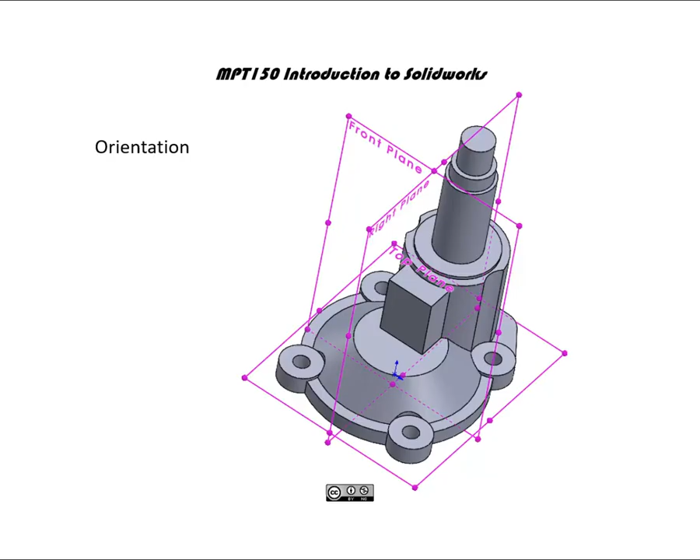Practice problem: 8.5 millimeters, grams and seconds. Part origin is located at the center and the bottom.

We have lines, circles, center lines, lofts, extrude boss, extrude cut, and circular pattern. The loft is between two circles.

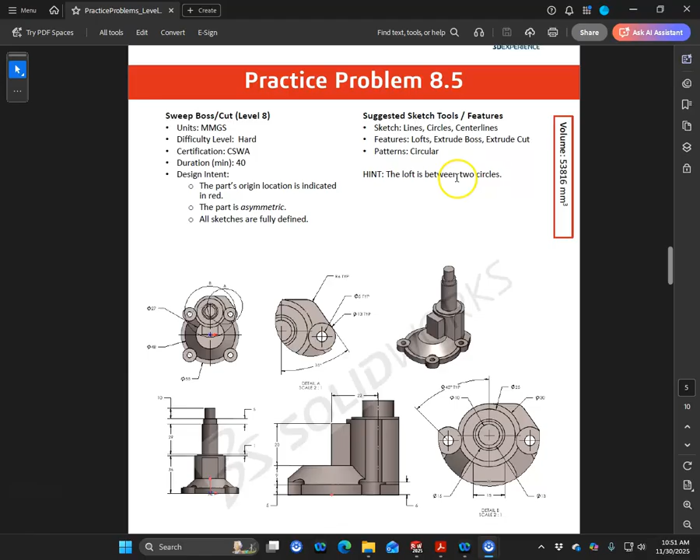All right, so let's go ahead and zoom up a little bit on this and see if we can get a little better detail.

I'm not sure why this needs to be a loft. It kind of goes towards could just be a revolve, but I think part of this too is just going to be looking through, being able to see through the noise.

All right, so we've got a couple different scales going on too. Detail B is the bigger, and detail A is the smaller. So we've got to come up with some way.

So that's the undercut and the boss. Those are a little bit taller.

So that face to that face, and then the undercut or the relief back to that geometry and up both sides.

All right, let's go to 10 millimeters, 30 millimeters, 25, 45, 15 for the square. And then what do we need for the outside? 55 and 48 going to 27.

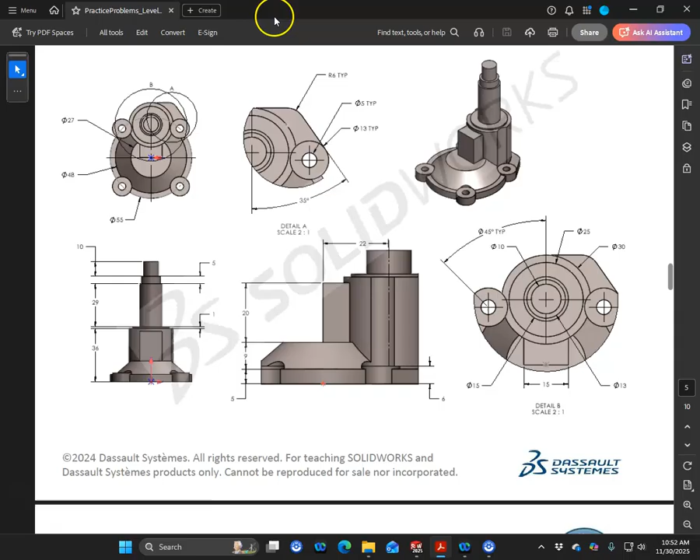And the height then goes 5 millimeters to the step and 9 millimeters to the top of the base. All right, well, let's get started with that.

And we'll see where that goes. We're going to start in the top plane, and we'll go with

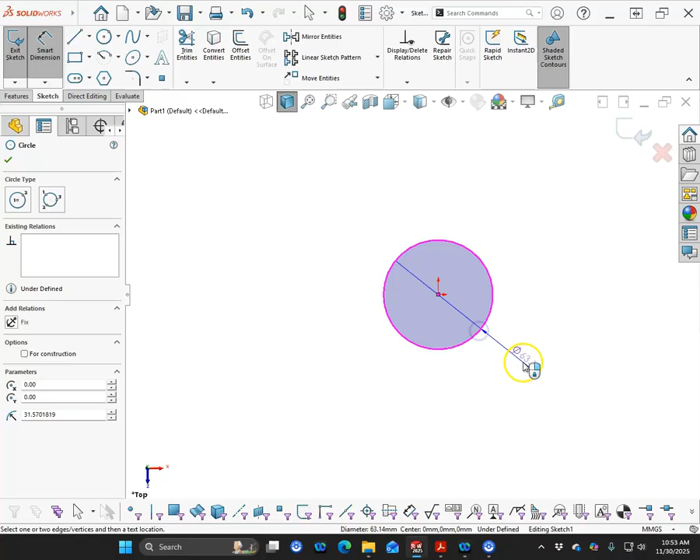the 55 millimeters to the outside and extrude it up 5 millimeters. Okay, so that gives us a starting point.

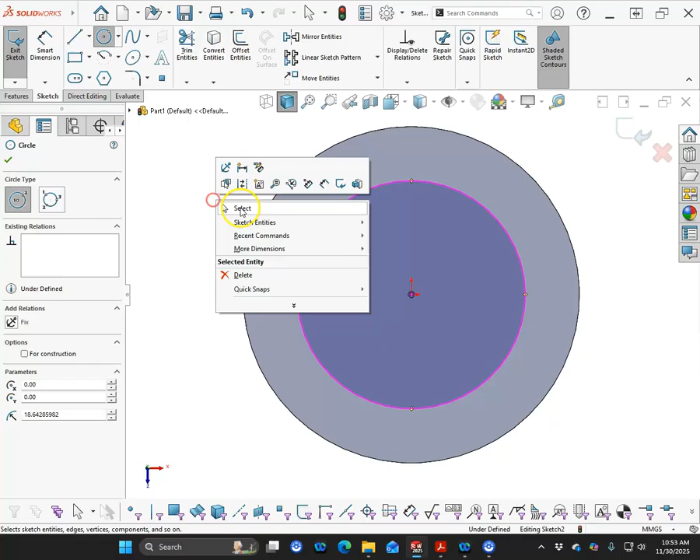The circle then at the bottom, and again, I probably would have, if they didn't show a loft or recommend a loft, and we weren't actually detailing a loft or introducing it, then I probably would have just done this as a revolve.

All right, so the right plane—nope, we need to still be in the top plane. Hold down the control button and select the plane, drag up.

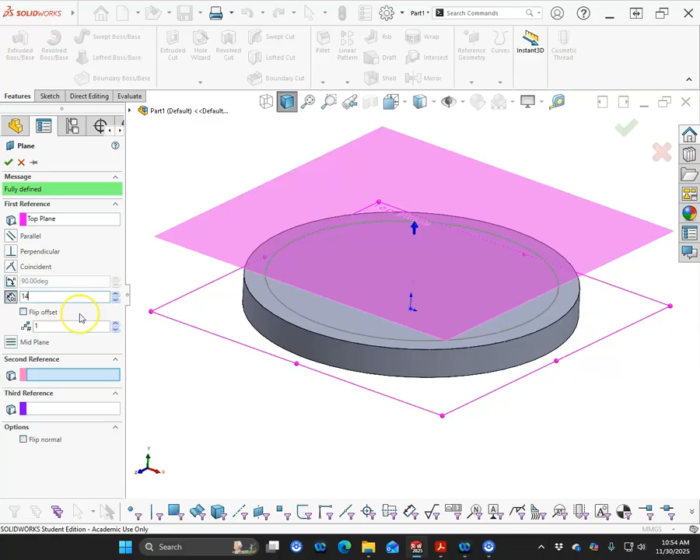We have an offset distance of 5 and 9, so let's just go with 14, make that easy. And then we'll go with a sketch on that plane that goes to 27.

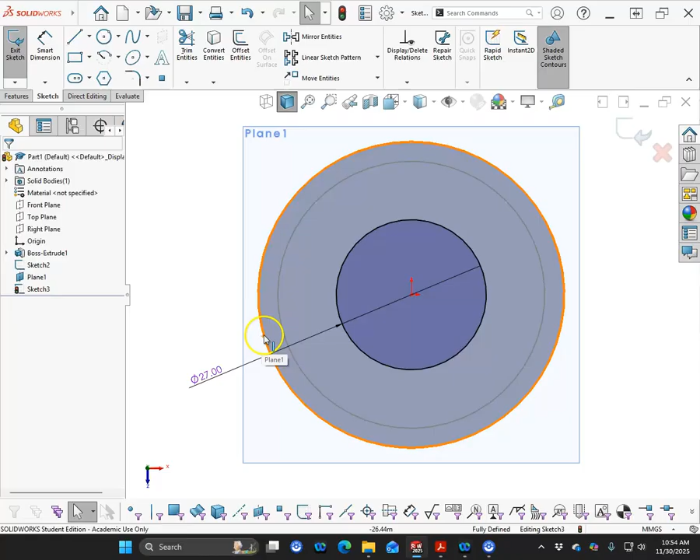All right, so kind of like the sweep, we need to have two sketches, or in the case of a loft, two or more. And what that's going to do is calculate the geometry between.

So if this is just a straight line and it looks like a revolve, then we're okay. Where the loft would really become handy is if maybe this had a bulge or shape, or these were elliptical and we couldn't do them with those shapes.

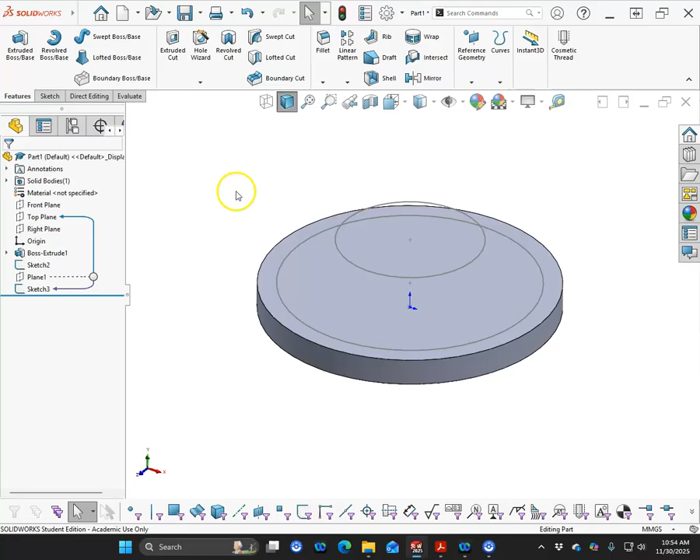So let's go to the lofted base, and we're going to do sketch 2 to sketch 3. I don't really want to move these because I think they're probably in pretty good shape along the right plane. And if we move this, it's going to start to twist and do some strange things.

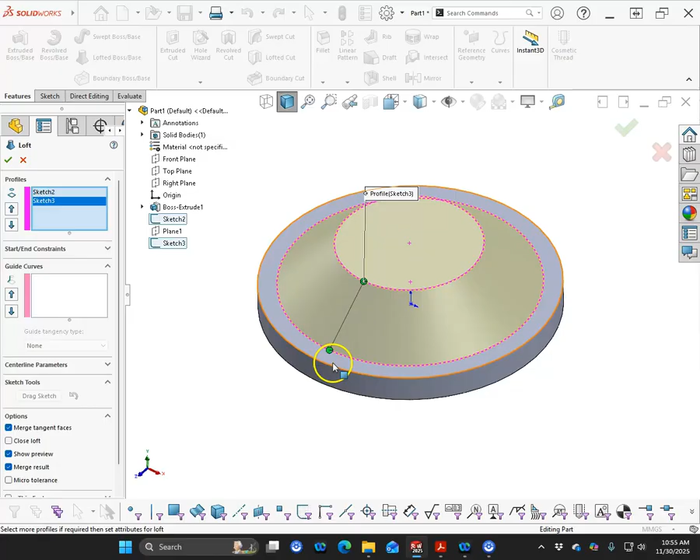Could always do a guide curve from point to point. That's one way. There are other methods that we could possibly work with to manage the circles.

All right, so what do we have for a bolt circle? 45 degrees. We have to the outside.

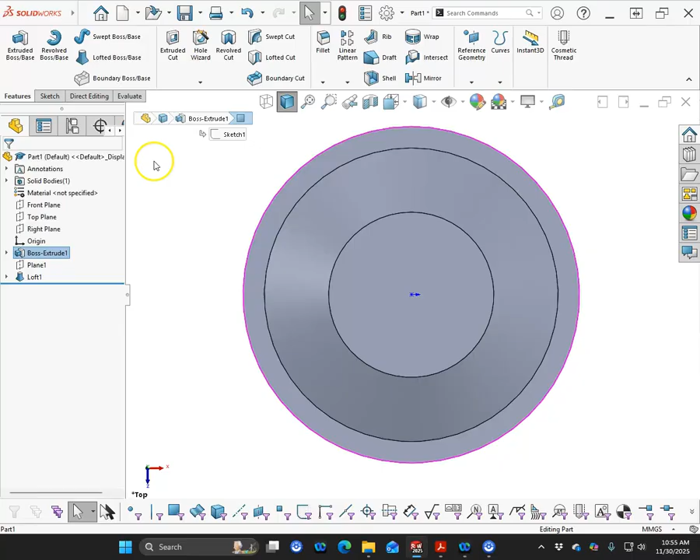So let's go back. Well, we can either pick the bottom or go to the top plane. Doesn't really matter. So let's open up that sketch, and we'll go ahead and put in the geometry.

Since I don't really have anything to build from, let's see, that diameter was called out as a 13.

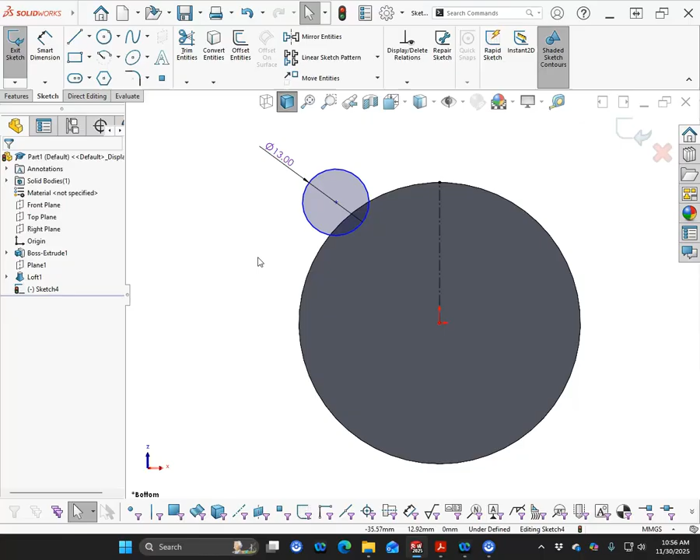Okay, and I'm not too worried about the geometry for the hole and the cut yet.

So we previously tried to do the vertex, an endpoint, and a point, and now it gives it to me. I'm not sure what was going on with that geometry, but if I needed to, I could have put a point up here and just picked between 3 points.

Or if I wanted to go with a line, I would need to put another center line, and that would give me an angle between the two center lines. So there's an angle off of the back side.

I wonder if they're going to try to blend that. No, it's just off of—actually it's off of the other side.

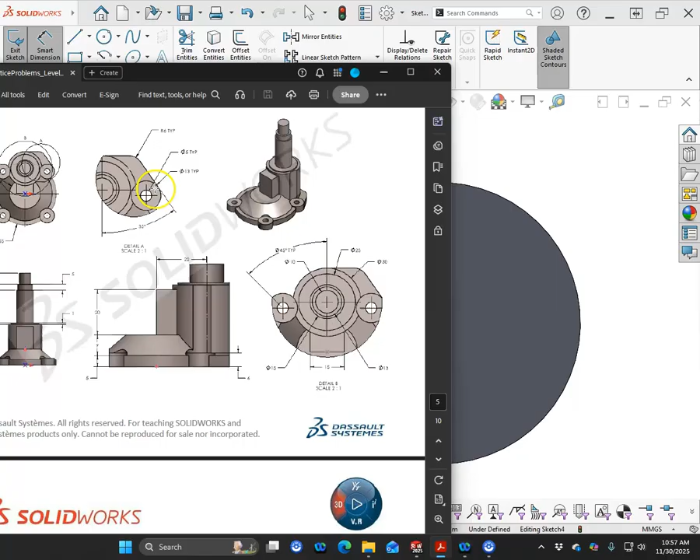So let's take a look. This has a lot of noise in it. So 13 off the back. I'm not really seeing anything that indicates a center.

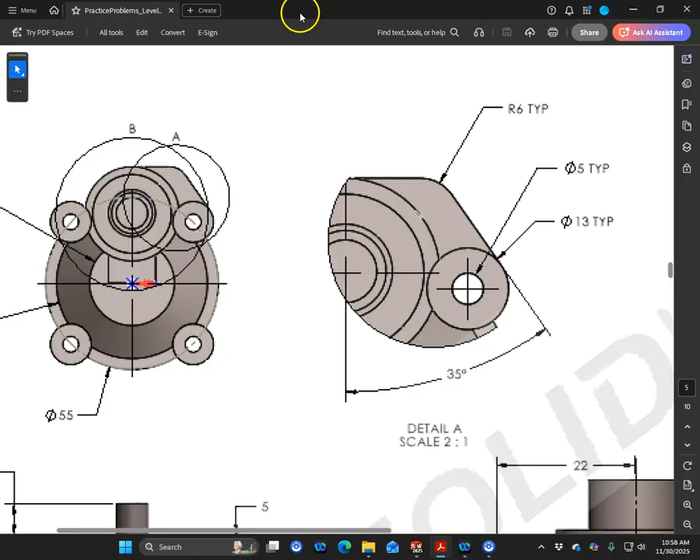Well, it's sort of. Yeah, and it's another one of those. Let's kind of go over this way. So yeah, it's looking like the 55. Okay, well, we're going to go with the bolt circle is the outside or the perimeter of our circle.

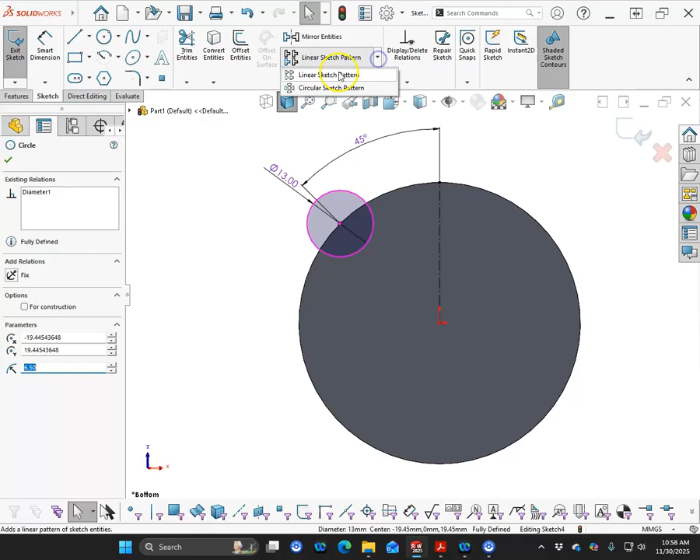So get out of the dimension by hitting escape. Okay, make sure that I'm actually out of the escape. All right, let's go ahead and just drag it then. And we will go ahead with a circular sketch pattern. We have the 4.

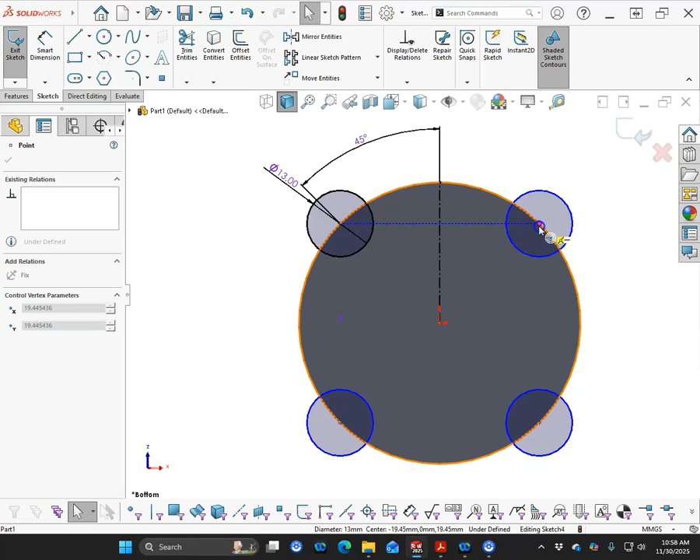Didn't really let me put that in, but let's then dimension the radius. See if actually that one should already be there too. So let's just get the 45 in there. And then we can drag away, drag back, pick one of the other ones, drag away and drag back, and that'll give us our fully defined. All right, so I drew that on the bottom. It went normal too.

So that geometry then got called out on the step to a height of 6. All right, let's make sure. Yeah. So 6, and pretty sure those are going to be the steps. So I'm not sure why they would do that. Makes the machining at this intersection more difficult, but

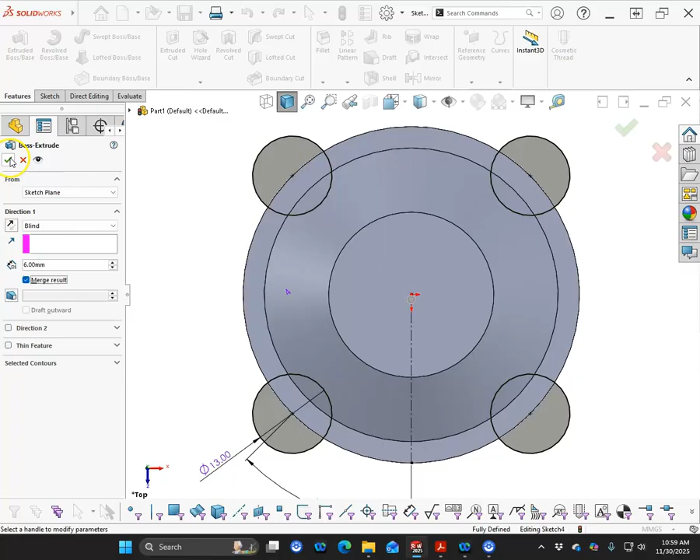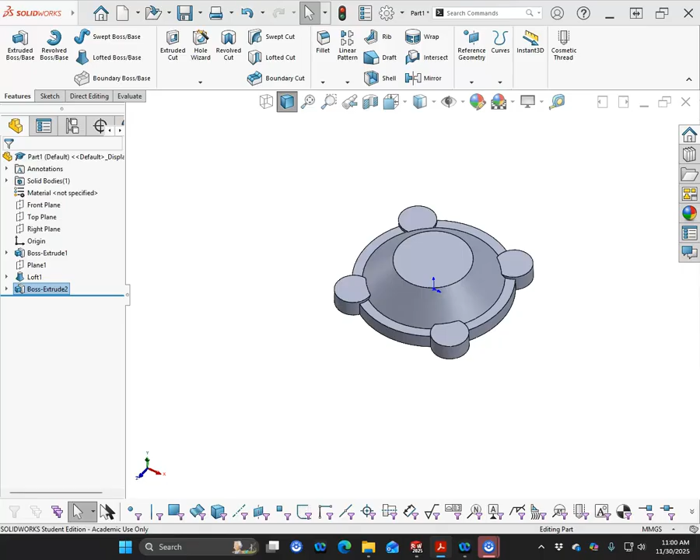if we're actually manufacturing, or if this was a casting or 3D printing, we wouldn't care so much. And it would help to go the right way. So let's edit the feature again, flip the direction, and go ahead. All right, so this corner to this corner, those will ultimately need radiuses or something else if we were actually going to manufacture this piece. All right, so our diameter then, we have the steps.

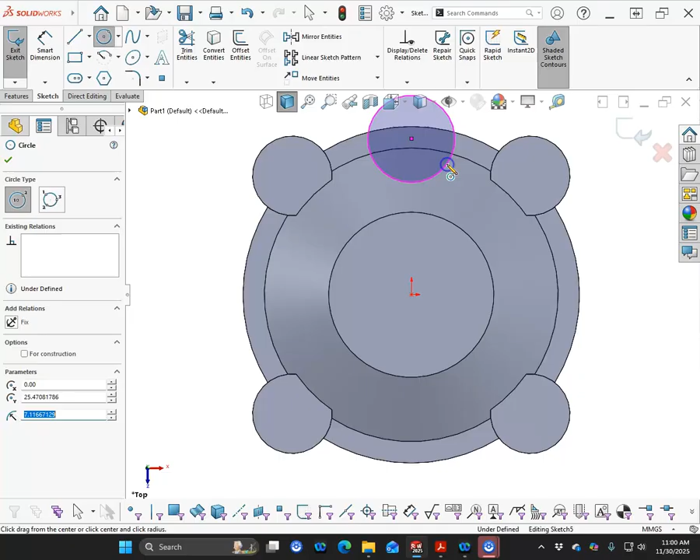So let's go to the top plane and you'll see the difference that the top plane comes back this way. This segment is going to cut in on each side into the end of the base. So let's see, they're giving us center line of 22. So let's start it somewhere. We'll get close to vertical. And the exterior is a diameter of 30.

And let's just go 22. Okay, and then the last will be to make the center point and the origin vertical. Do I want to go ahead with the rest of the items? My tendency, if I was just drawing this, I would probably put the other circles in so that I could reuse that sketch, but I think I'm probably going to end up with just too many selections there.

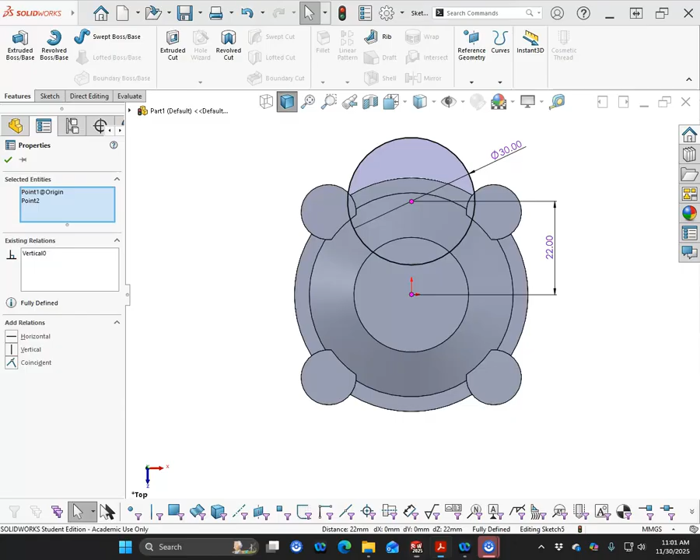So for this one, we're going to go ahead and extrude and bring it up 36. Open up the next sketch and find our center. So if I don't find the center, I'm dragging over the perimeter. And we need a dimension of, we went 30, and then we're going to have 25, and that is going to go up 1 millimeter.

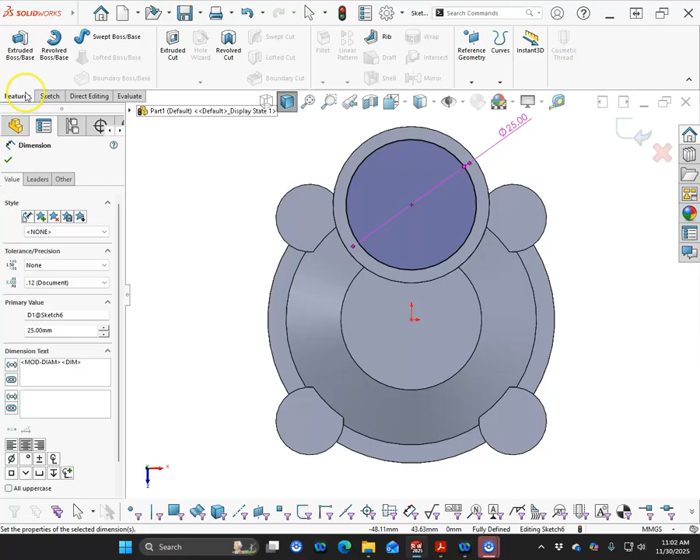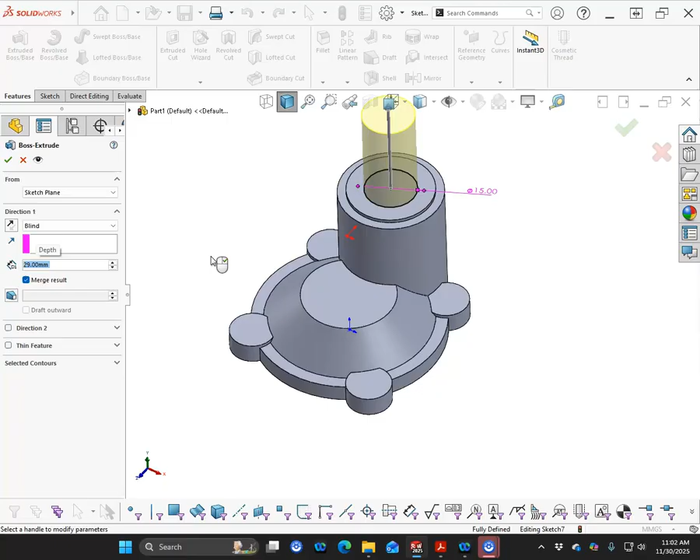Yeah, I think this is going to work out better too because these are all chained together, one on top of the other in the dimensions. If it was baseline, we'd be better using the shared sketch. So this one goes to 15, and then we're extruding it out to 29. Okay, just kind of double checking the numbers as I go.

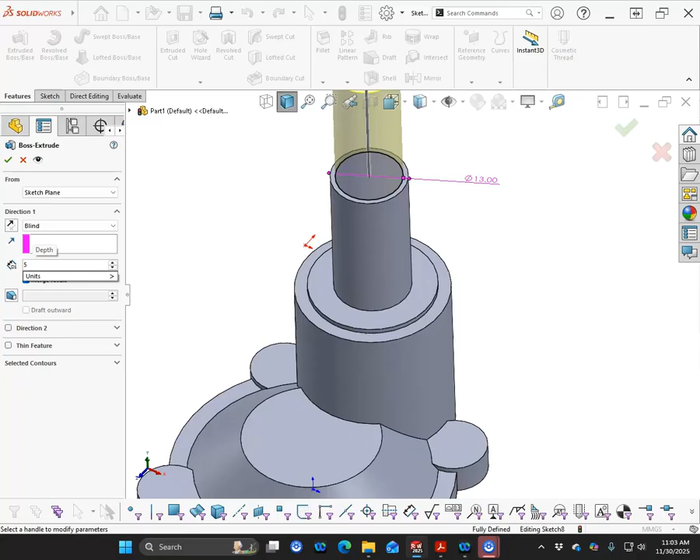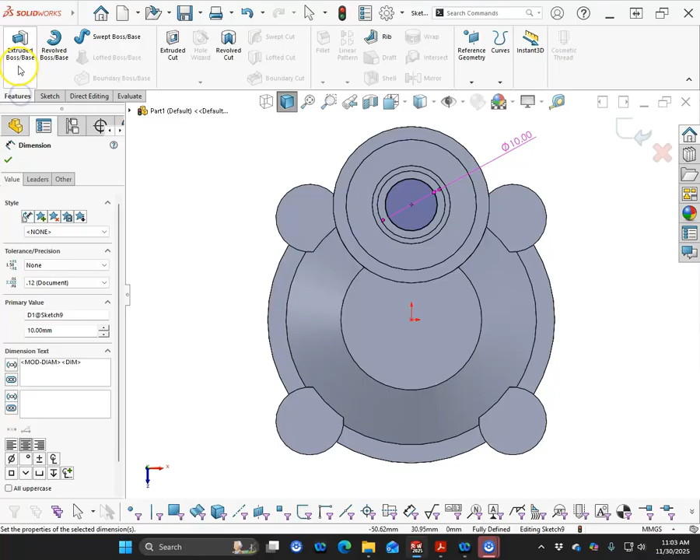Open up the next sketch, goes to 13. And extrude. And then that one goes 5, and we'll accept. And then the last sketch goes to a diameter of 10. And features extrude, and then also 10 millimeters. All right, couple enters to clear that out.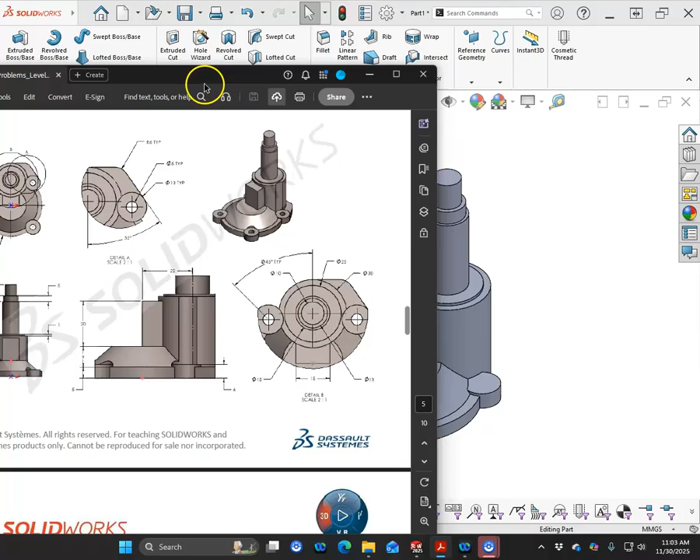All right, so I think we're looking pretty good. Let's do a reality check. So this backside has a little relief or an add-on. 35 degrees, tangent, tangent. So we should be able to do that. Probably end up just converting that geometry. So we're getting close, need the block in the center. Don't want to forget that.

So let's go top plane and sketch. So when it comes back around, I'm not trying to reverse or manage that geometry. So let's go with our shape. We had an angle of 35 from the vertical. So rather than doing math and figuring out what the adjacent angles are, I can put in a center line and set the angle.

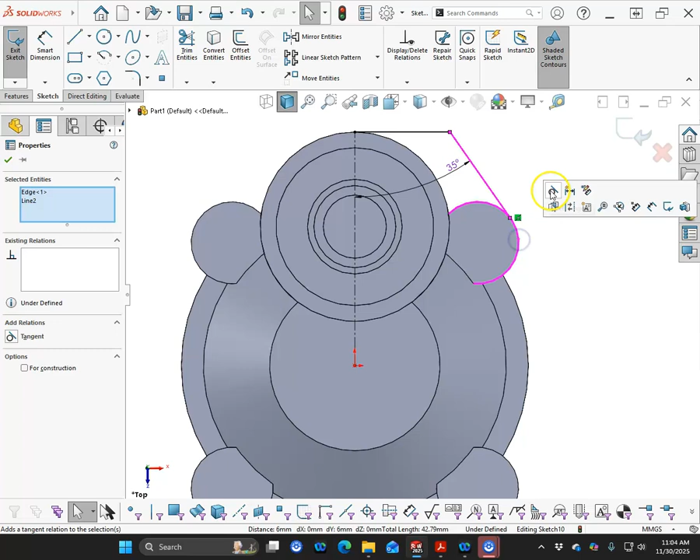Let's see, did I get a tangent? I got the coincident, but I did not get a tangent. And then the fillet is going to be radius of 6.

So let's go ahead and put that in there. And then we need to accept. Let's pick and convert. And then with the convert, it'll probably be a little easier if I drag those endpoints back around and just make it a complete region.

So extrude, and I'm going to do up to surface since it should have the same height as this step, or in my design intent, I would like it to have the same height. All right, so on the rectangle then, let's go ahead and select the midpoint, the origin, make it vertical. We have a width of 15.

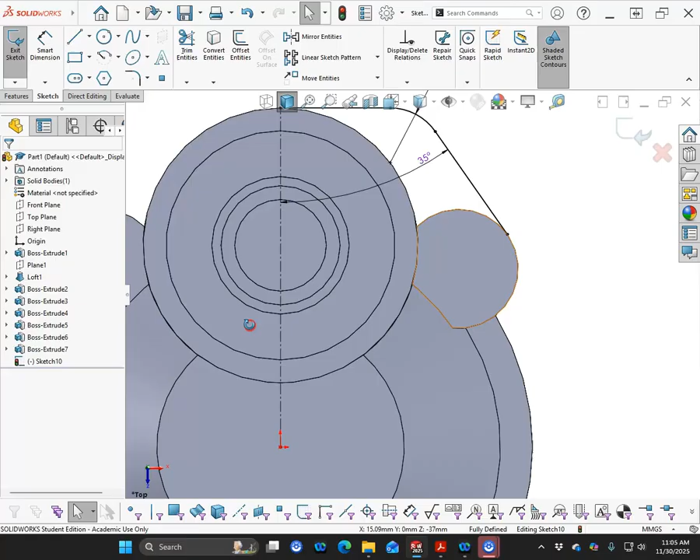And where is it positioned at? Actually, looks like, yeah, it's going through the center. All right, so didn't need to make them vertical. So we'll just go ahead and switch it to midpoint. As long as there's not a conflict there, the vertical won't really do anything.

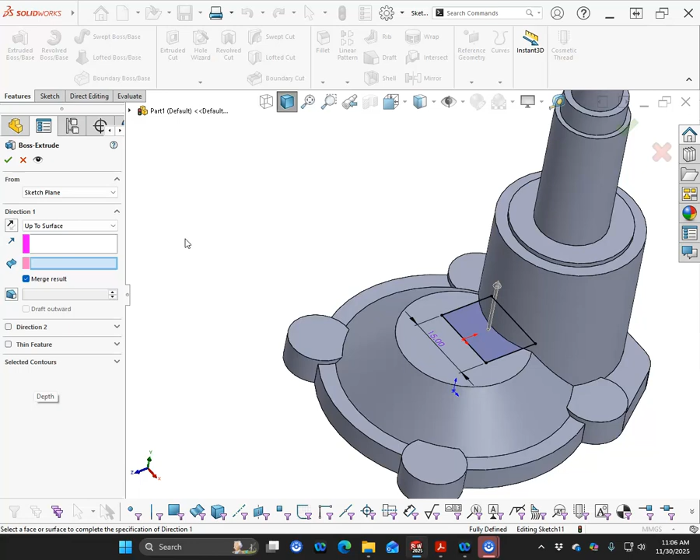And then I happened to grab coincident apparently. Yep, grabbed coincident on one side, which since it ends up subflush to the surface, I don't know that that's necessarily a bad thing. And we're going to extrude this to 20. Oh, I guess it would help to put it back in blind, 20 millimeters. And okay, any radiuses, fillets, blends on that? Okay, now we can concentrate on these guys.

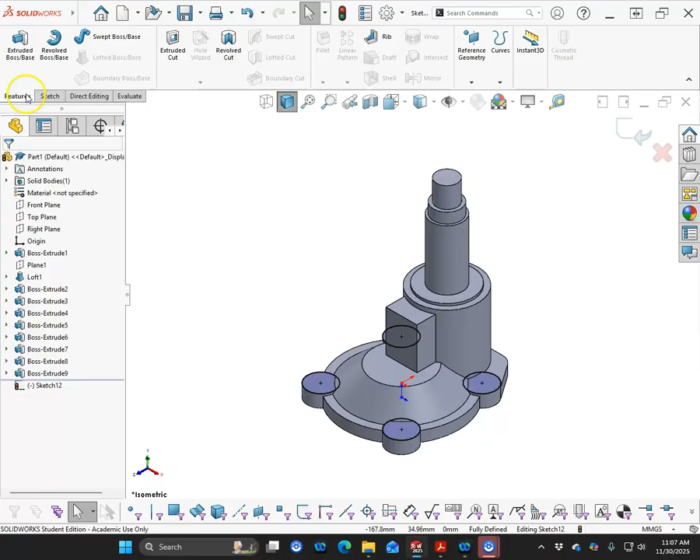So let's do the convert again, and we'll use that drag. Okay, so once we convert the entities, probably be a toss-up to just drawing the circles again. But since they're tied to that geometry, it does kind of help to build that out. So let's go ahead and extrude cut, reverse the direction, up to next, go ahead and accept. All right, so that's looking pretty good.

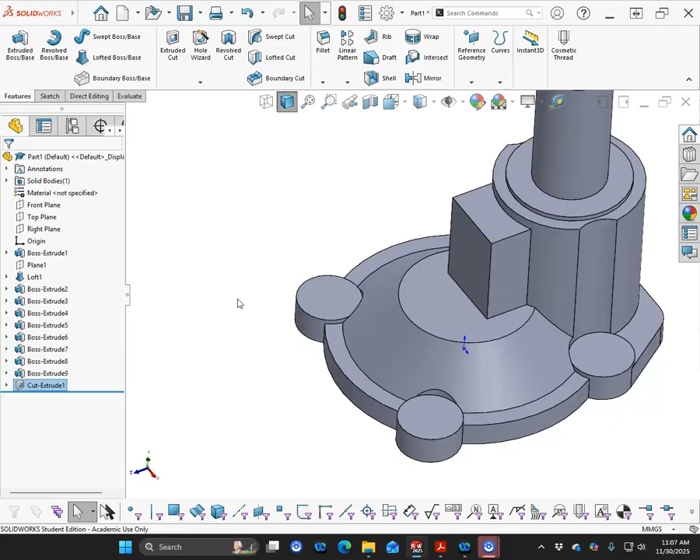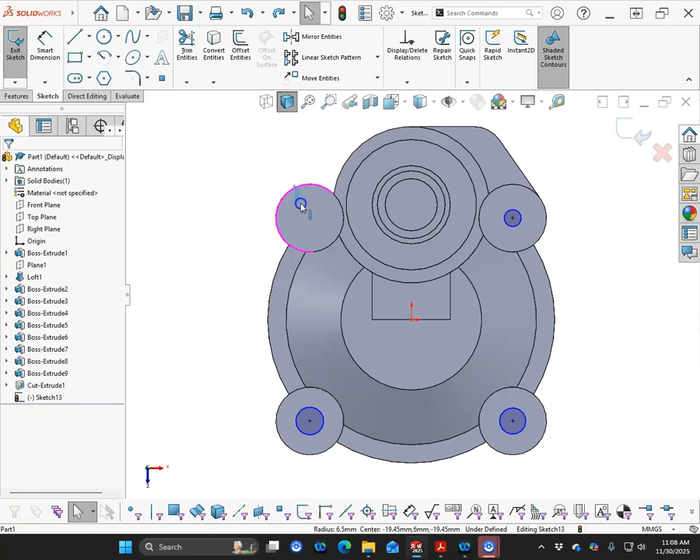And then our last bit of geometry that I can tell is going to be the diameter of 6, and those are centered. So we drag over the edge, find the center point. Yep, let's make sure to place it. Well, didn't want that one, so I'm going to give it a Control Z. Yep, kicked me out. All right, and we'll go back in.

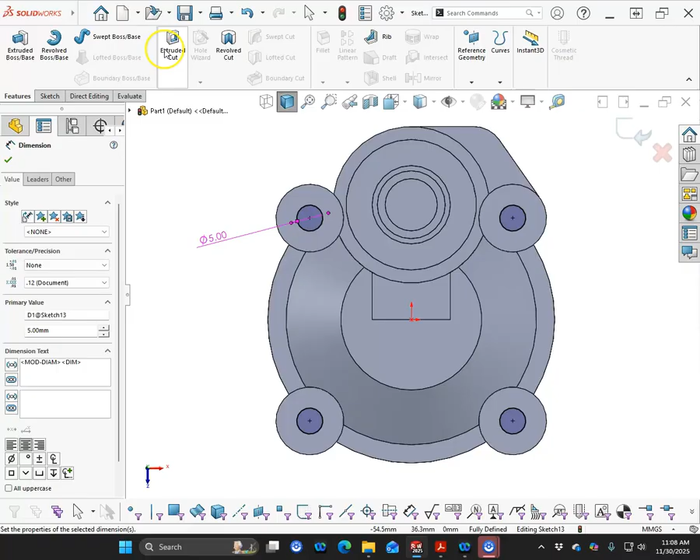All right, all of these are going to be equal then. And we'll go into the dimensions, set it to 5, and extrude cut. And we'll go back to through all. All right, so a quick look at the geometry in our isometric. And that looks pretty darn close. We've got the little elliptical reliefs, the little fingernail cutouts, and the shapes.

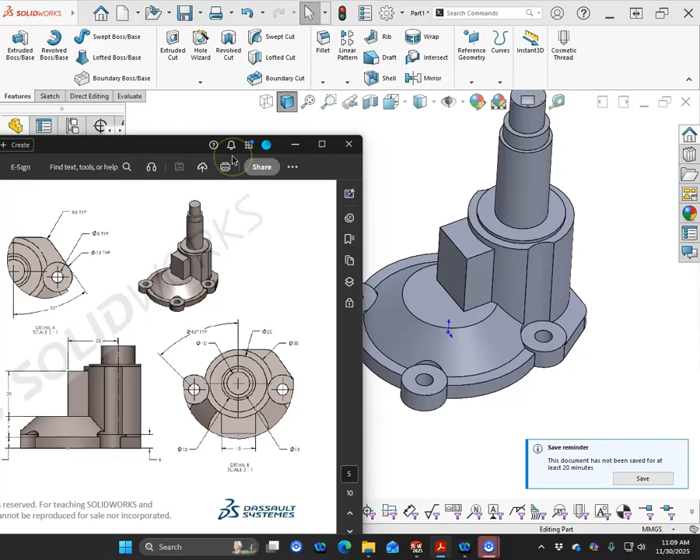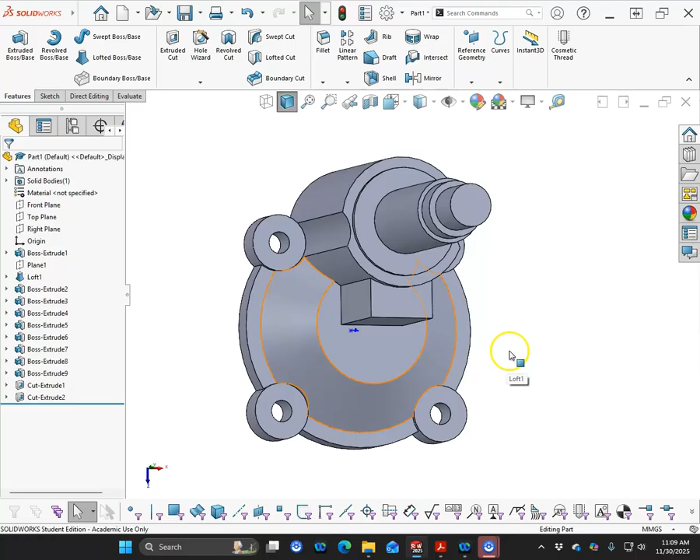We can go to maybe a top view, and yeah, that comes over to a sharp. So, again, looking at this manufacturing wise, these wouldn't be sharps. These would have additional radiuses, or we would have to do some more on the blend. And usually a spot face like this would be subflush of this surface, not proud of it. All right, so anyway, we've got our list of our features.

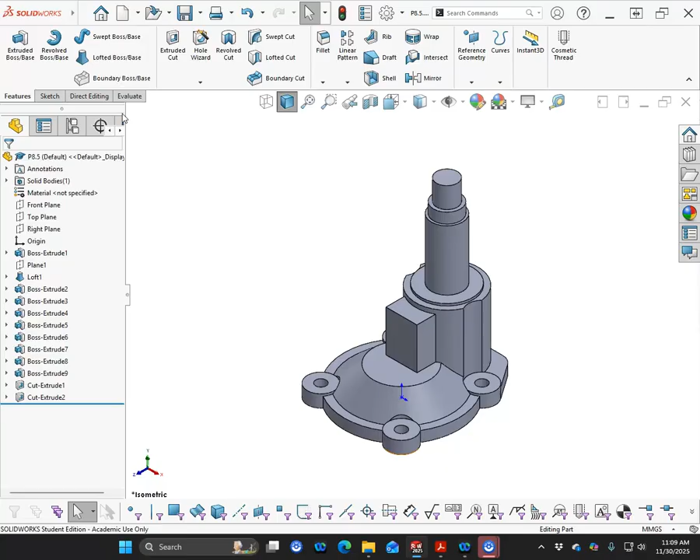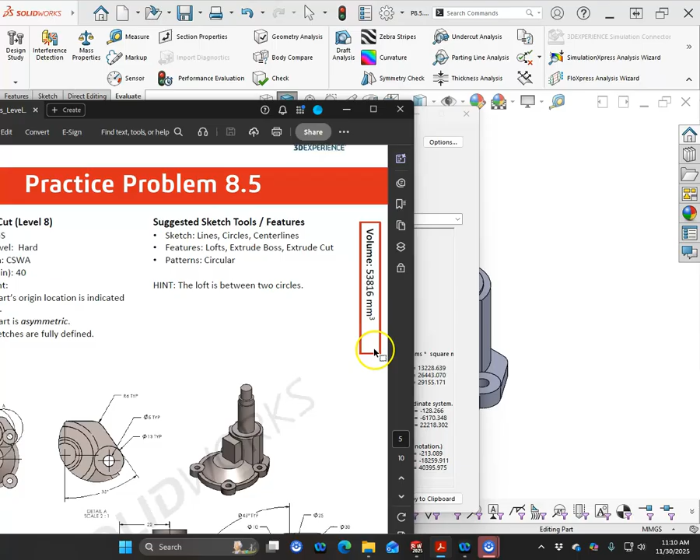Let's go ahead and save this as 8.5. And our volume then, I usually put the dashes, so we'll do a rename on this one just to really go back through the process. All right, 53,816, and we had a number of 53,816. So did pretty good with that one.

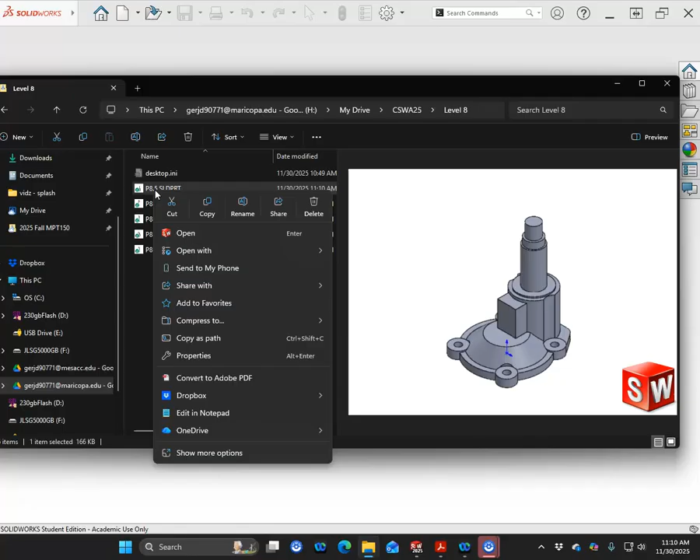We'll save it, and I don't like going back to the DOS days. We didn't put periods into the name, and even though the latest Windows don't really seem to mind, it's not a preference of mine. So get into the habit of when you rename anything dealing with SOLIDWORKS that you go to the show more options, go to the SOLIDWORKS

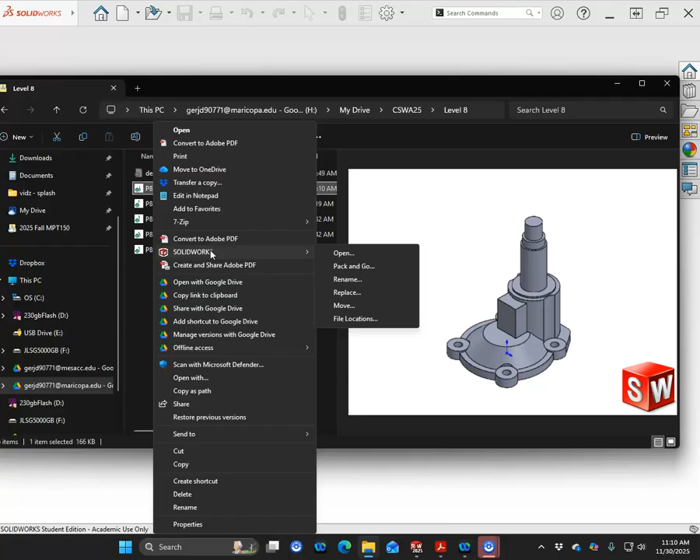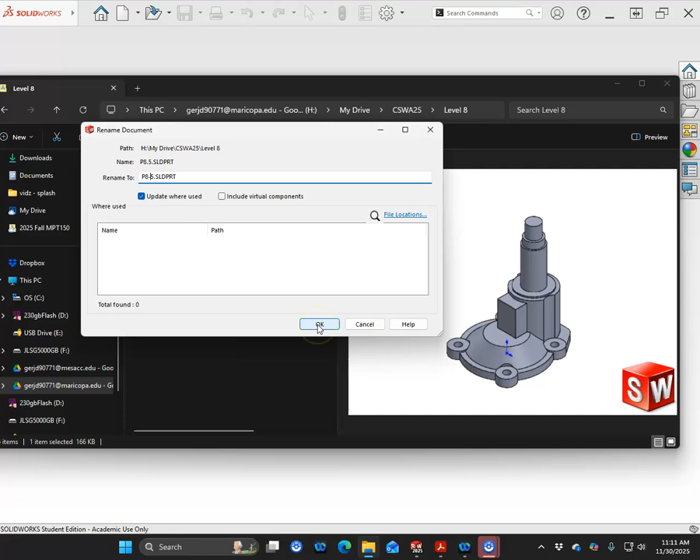and do the rename. So if this is used in an assembly, or we've already made the drawing, it will update those items. If we're renaming an assembly, then I would want to include virtual components, so that anything that was created and embedded in the assembly has that link, that associativity updated. All right, so it renames the 8-5. It's not a critical step.

We could do the single click, and then next time you open it, if there is an associative location, it will just ask you to go find it. And if there's multiple, it will ask you every time. So, all right, I think 8.5 is good, even though the part was pretty busy, and got through it.